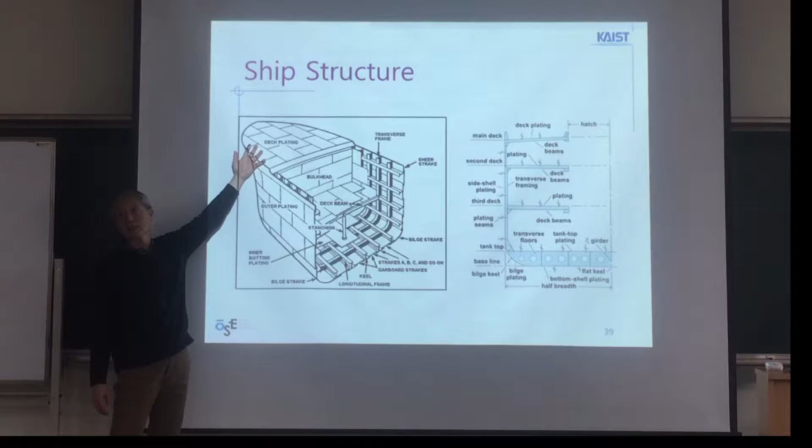But anyway, so you can imagine that 100,000 pieces of this steel plate is used to build a ship, right? And also you need to bend the plate and cut, bend, and also welding. That is the most important work for the shipbuilding company, in addition to engines and telecommunication and other, but it's the main body, structural engineers, stronger. So structural strength is important.

And then I usually use a bottle, water bottle, to show a ship, right? It can be a submarine, right? Submarine looks like this one, right? It can dive into the water. If you cut this one in half, the one half can be a ship, right? About half of the bottle.

But there is another additional structure, but the big picture of the ship can be one half of it. And then the ratio of length 20 centimeters, 25, and breadth 7, 8. So ratio of length and breadth can be how many? 5 or 4, right? The ratio is 4 or 5, right? It looks like that, but usually the ship, ordinary ship, large ship, the length to breadth ratio is 7 or 8.

Means it's longer than this. It's longer, right? So I can say this is slender. Some ships the ratio can be 10. 10 is double this length, or same breadth, right? Thank you.

How do you think about my length-breadth ratio of my body, right? Different ratio in here, right? Depth and breadth is different. Looks like a slender, right?

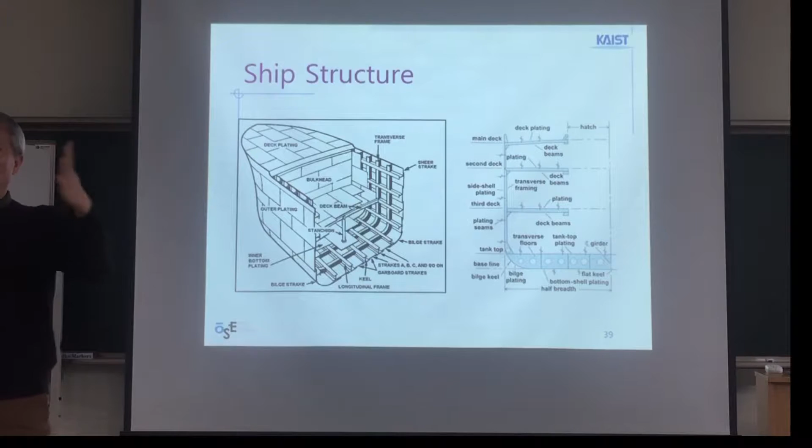Slender, comparing to ordinary. So for that slender body, the bending break fracture is the most weak point, right? Long, thin steel pipe can break in this way, rather than the other way. That's why the ship is kind of slender, so the midship section structure is most important.

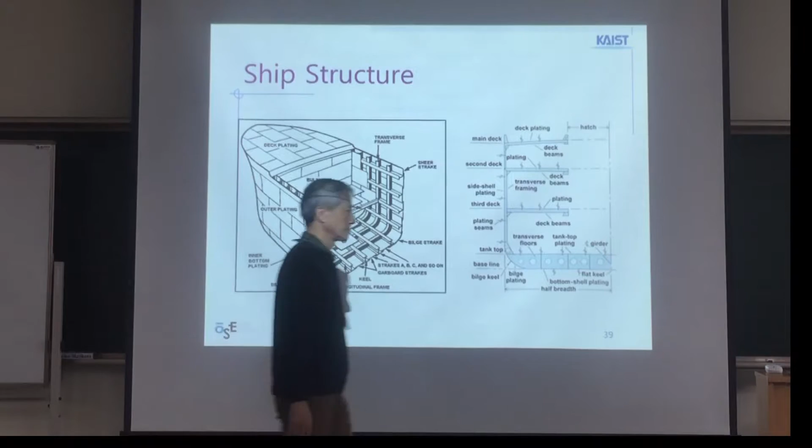Because of, you see, the rough waves, and in the middle there's a pen... Ship is slender, right, slender. Propeller is here, and wave looks like this one, right? Wave, ocean wave, big ocean wave. Then it's supporting this, but it's bending in this way, right, this way. It can break in the middle because of the long, high waves, because of slenderness.

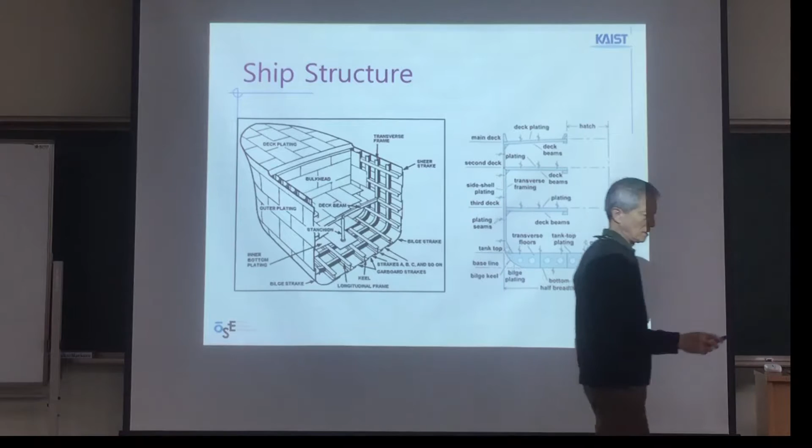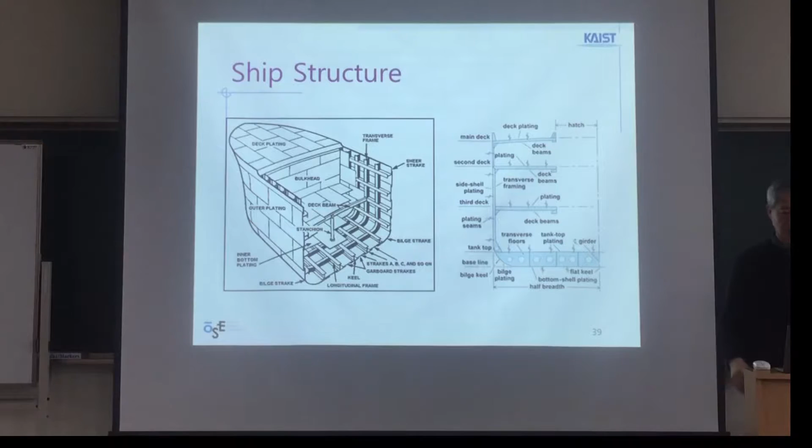And they want to make it strong enough, not breaking from the wave or other slamming or something. So that's why there are complex names and weight definitions.

Okay, when he bought this bottle, the bottle is fully filled, right? Maybe some air gaps are left there. If you fill it up to 100% with water and keep it down, how do you think - if I have a whole filled bottle...

If I put this one into the water, how do you expect it - is it floating or going down to the bottom? What is your expectation? Full of water inside, no air.

So what is your answer? Floating or going down into the bottom? Floating, or going down to the bottom?

Right, so we will see next time. He'll bring it. My answer is floating, right? We will see that, but it depends on...

See, water and water are the same weight, right? We call this a ratio, something. What is the English name of 비중? Specific weight, something, right?

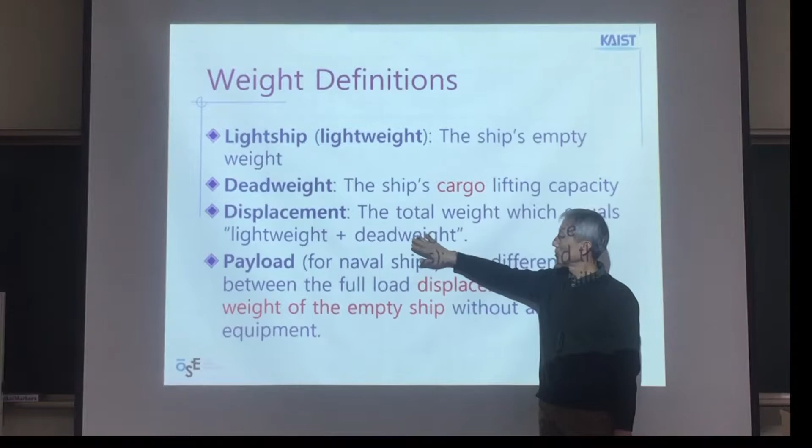Okay, then I want to start from displacement weight. Displacement weight is the total weight. Start from total weight, which equals light weight plus dead weight. Light weight and dead weight, right? So it's a total weight.

What is it? So if I - how big is it? How big is it? 500 milliliters, something like that. Half a liter, right? So then it is half a kilogram, or almost about right, half a kilogram weight.

So there is a total weight. If I place this one on the gauge, it should say, half a kilogram, right? But this here consumes one third, so it can be 0.3 kilogram weight. Now this is the total weight of this ship, or submarine, right?

Submarine. And then when I put this one into the water, then it is floating, right? Floating, but not floating in this way, but floating somewhere in this way. Somewhere here, right? The water line is here, right? Maybe here or here, probably around this, because this is what's inside.

Right, displacement. This is a static equilibrium between total weight and water support from the water. Then it is static equilibrium, floating in this way.

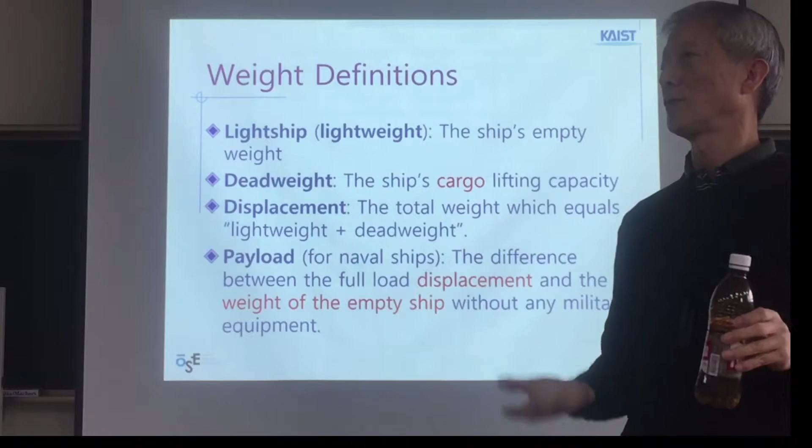부력, right? Buoyancy. But buoyancy, we call it altogether, is buoyancy. But what is a component of buoyancy? Pressure from the water.

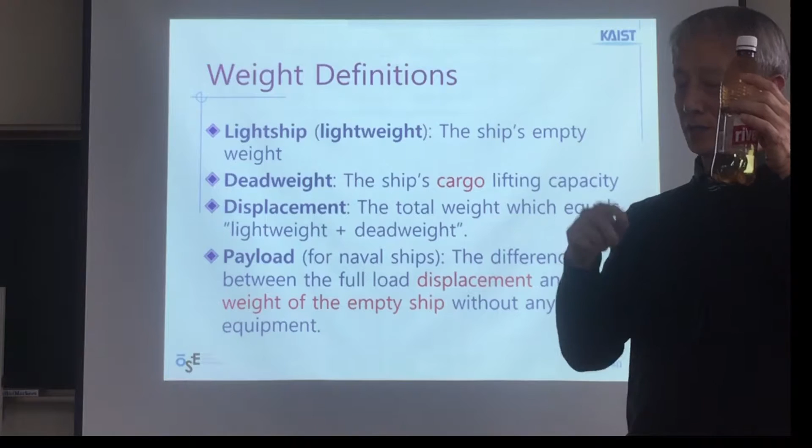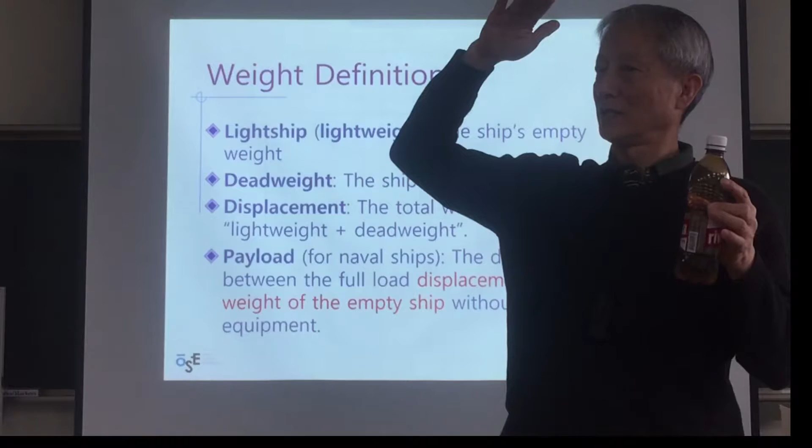Pressure inside the water is everywhere. At one point, the surrounding pressure is the same, right? But the water pressure depends on the depth of the water. If we go down to 100 meters or 1,000 meters, the pressure is very high, right? That's why a submarine collapses, right? So you can expect that if you put this one into the water, it's about here, but the pressure is...

Not the same. Almost zero, meaning atmosphere, same as air pressure, right? Going down, pressure is increasing, right? Because at 1,000 meters, very high pressure. So pressure is dependent on the depth of the water.

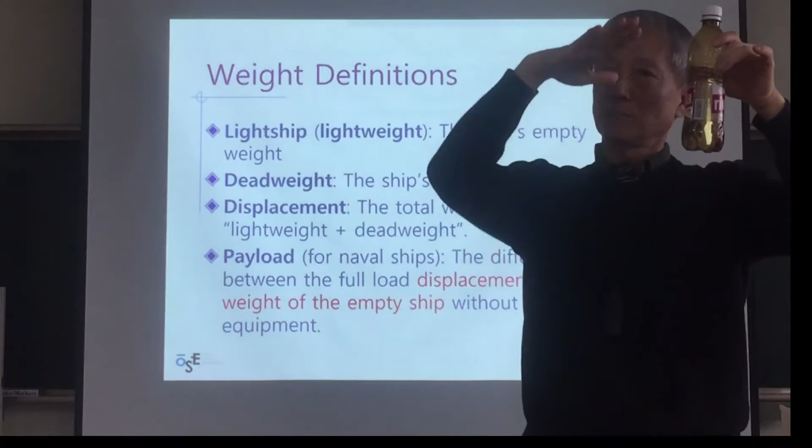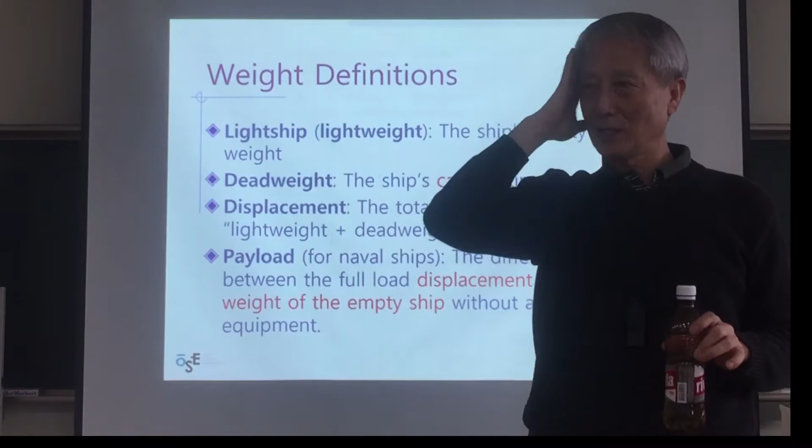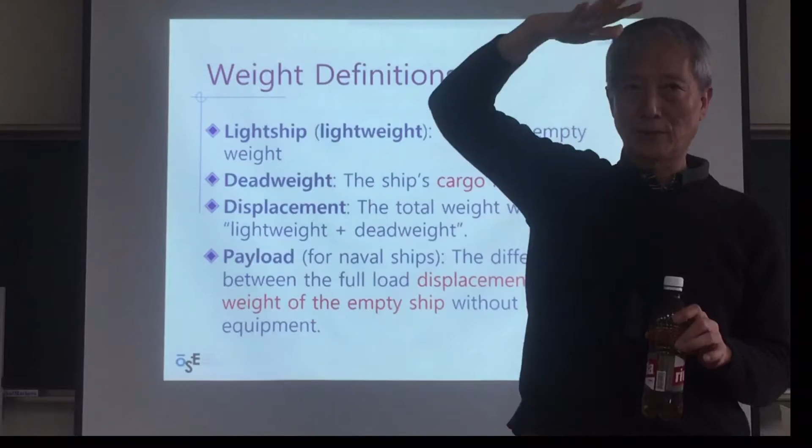Why? The weight of the water is compressing, right? Air pressure is also the weight of the air. We are experiencing pressure - you cannot feel this, but we are under pressure, right? Air pressure is coming from the weight of the air far away, probably 10 kilometers higher. That's where the pressure is from. So this water pressure is coming from the weight of the water above.

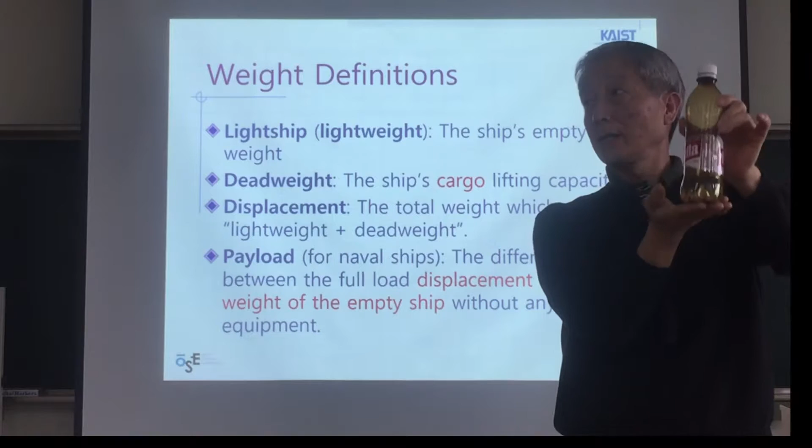When you integrate all the pressure, then it can be buoyancy altogether. That is the answer, right? So calculating the buoyancy is not easy, because pressure is changing, and also surface shape is not simple. If we are using a box, then it's simple. Not so simple, but you can calculate.

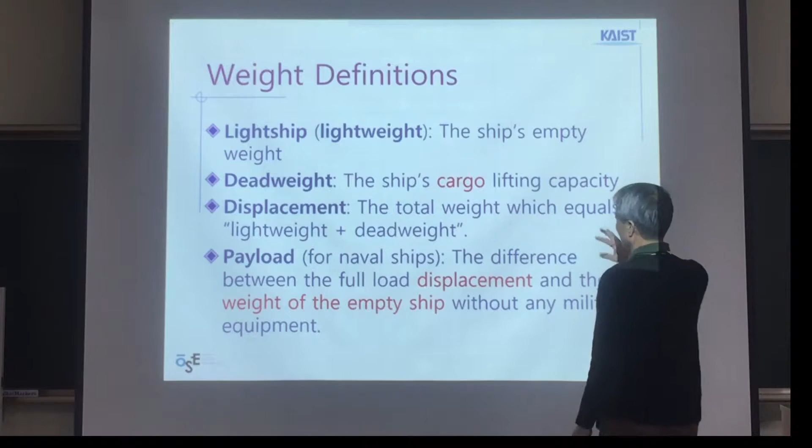So once again, what is displacement? The answer is the weight of displaced water by this object. When I put this bottle into the water, it is pushed down, right? And surrounding the object, so that submerged body displaces water. Instead of water, the bottle is inside. So the weight of this submerged body's shape and volume, that is displacement weight, same as the weight of the water. So we call this displacement - weight of displaced water by the ship or by any object.

This is static, not dynamic. Static. But dynamics coming later. So now, currently, we have a static equilibrium. Static forces, force equilibrium. Weight of the ship, right? Weight of the ship, and supported by buoyancy, or buoyancy coming from the pressure, water pressure.

So this total weight is lightweight and dead weight. Simply, lightweight is empty ship weight. When the ship is constructed by a shipyard, this is empty - just finished the ship, just constructed a new ship. Same as a new truck - you just buy from the car maker one truck, it's an empty truck. So the weight of an empty truck we call the lightweight of the truck.

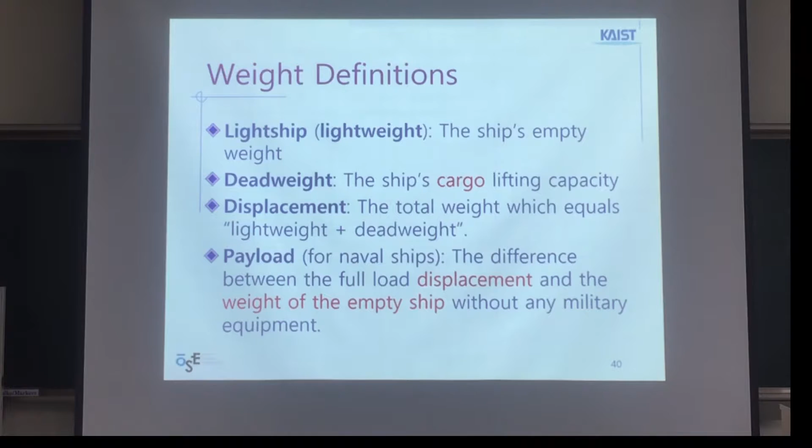So for a big truck, they carry only 1 or 2 rolls on the deck of the truck. They do not carry 10 or stack up to 20 steel roll cargos - never see this. Why? Because this is very heavy, and the limitation is already given to the truck. So it's allowed to carry only 1 or 2 rolls, that's enough - the other space is empty. So weight is very important for carrying cargo because there is a limitation.

Let's go back then - say, cotton carried as cargo is light.

Specific weight is far less than water. I want to carry many cargo to get more money, right? So cotton can be carried more than you can stack up. Imagine a truck case, I only carry cotton. Then you can stack up more and more, higher, because weight is enough, my capacity weight is enough. The limitation is coming from the height or volume of the truck.

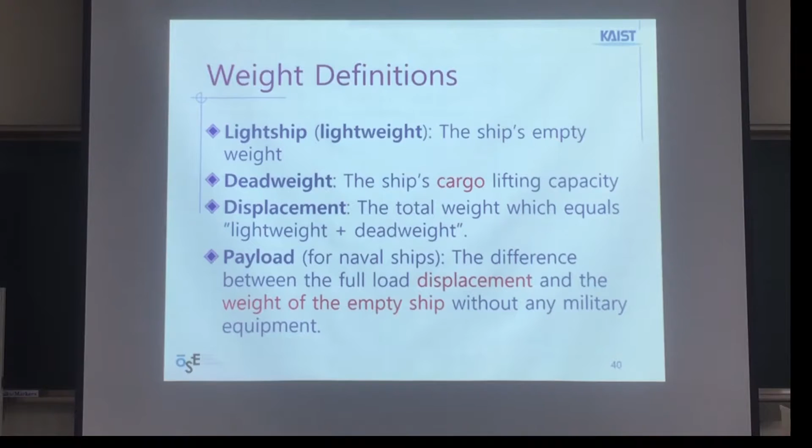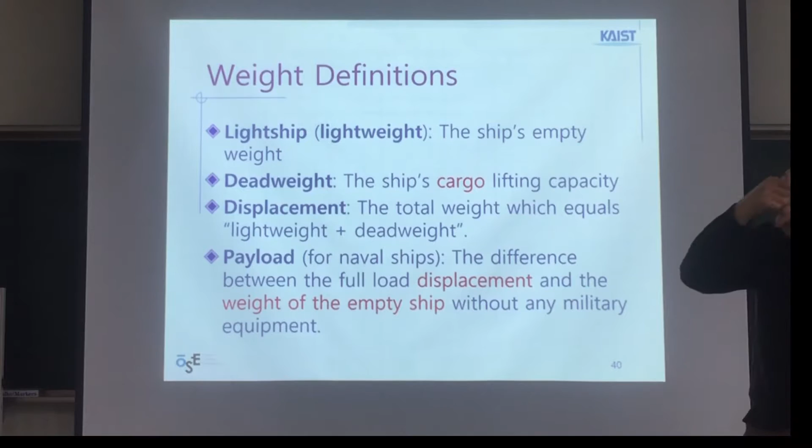There is also limitation by overbridges or bridges. You cannot go outside in this way or in this way. There is a limitation of carriage per truck, and also road is... So we call this two extreme cases. One is a weight limitation, the other one is volume limitation for the lightweight cargos.

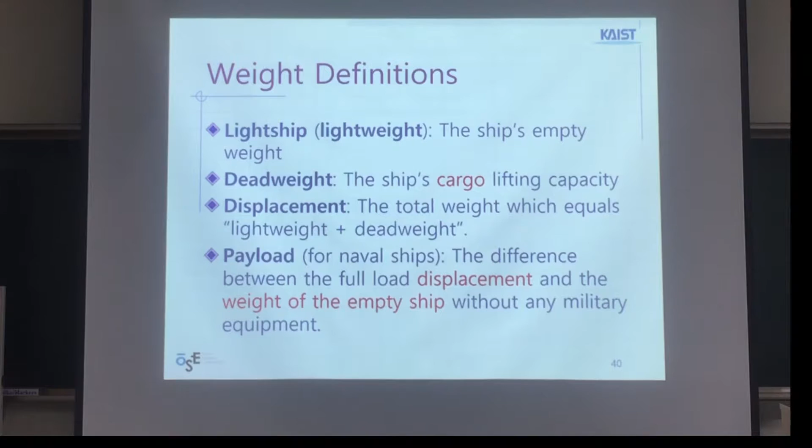Cruise ships. Have you seen a picture of a large cruise ship? Yes or no? Usually cruise ships are very high. The number of floors is very high, more than 10 floors above the ship. You can count, you can imagine this picture. I will show you later.

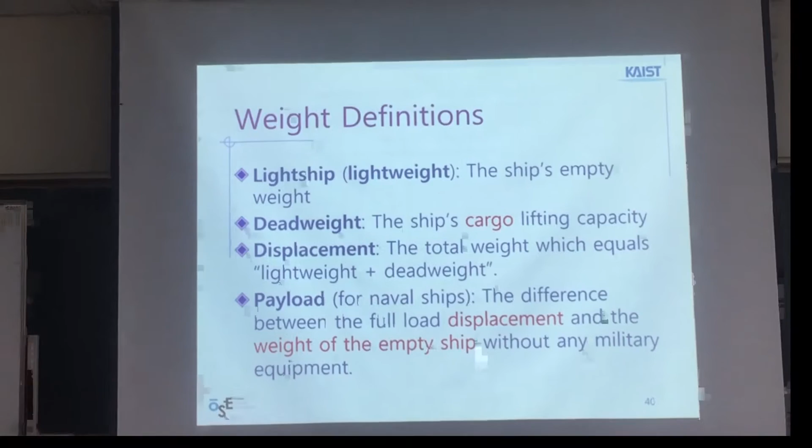Why? Because it is not weight limitation, it is volume limitation or area limitation. Everybody wants to have their own room inside the cruise ship. I want to probably pay more money, have a very luxury room and a higher place to see others rather than down below. So the ship operator, they want to provide more rooms to get more money. That's why they are stacking up. But the problem is this is not good for stability. If you think about a high-loaded truck, it is not good for turning in the corner, they may capsize the truck.

High stacking up, who carries cotton, they want to load as much as higher, because weight limitation is enough. Then it is difficult coming from stability. You should be very careful to drive that kind of truck. The cruise ship is similar, not the same case, but similar.

Higher, because of the money. The Sewol, for the Koreans, Sewol is the case. Actually the ship was imported from Japan as a used ship at the beginning, and then the Korean operator remodeled that ship to include one or two more stories to make more rooms. That creates a stability problem. So instead, they put more heavy weight on the bottom of the ship. But that is the behind story.

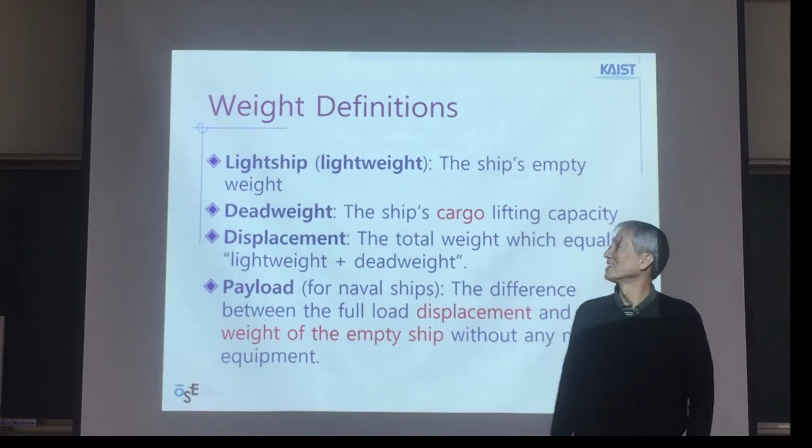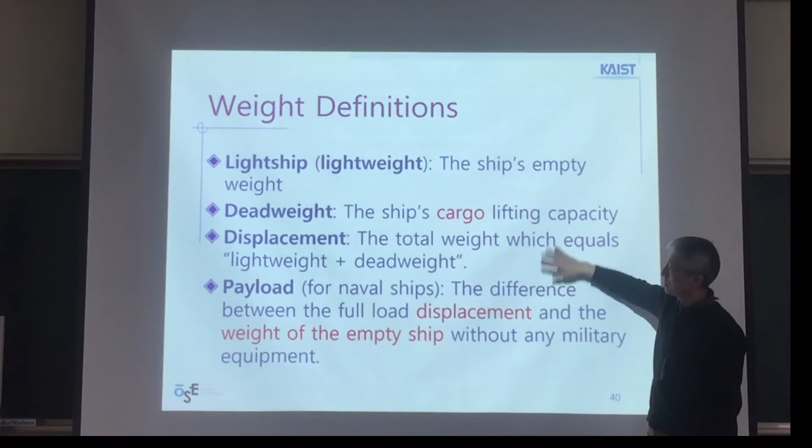But it is an important concept issue. So you understand what is empty ship, cargo weight, total weight, and payload, and deadweight is very similar, but a little bit different. Let's say for the truck case, should we include the weight of gasoline or diesel oil for operating the ship or cargo truck?

When you buy your new car, how much gasoline is inside? No gasoline? No, there is gasoline, otherwise you cannot operate it, right? So they usually provide you a very minimum level of gasoline inside. When I purchased a new car - have you purchased your car? No? Yes, oh you have.

You can think about a rental car. Have you tried a rental car yourself? Similar, right? They provide a very small amount of gasoline at the beginning, but nowadays the system has changed - they provide full or they provide middle size, but they write down the gauge. So if you return back with more gas, less gas, or the same gas, they calculate the difference.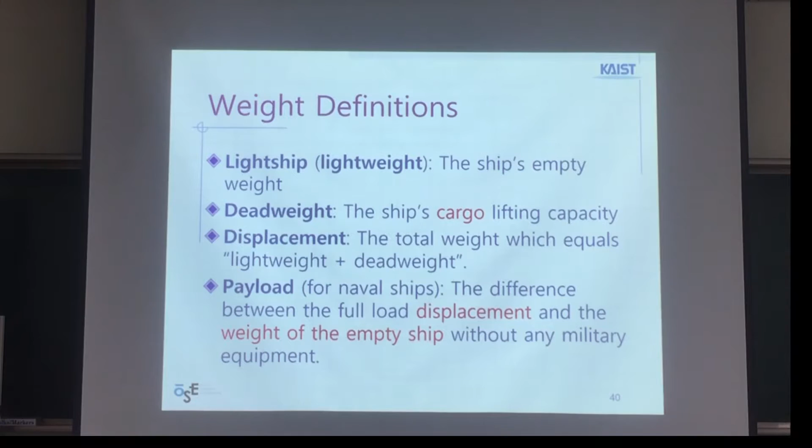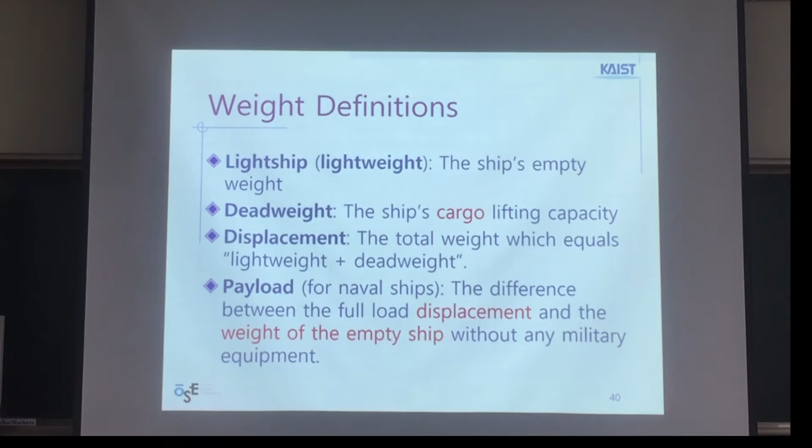But anyway, should we include the weight of gasoline for the ship, or onboard crew weight? How many crew are in the ship? Is it included in the lightweight ship, or payload, or total weight? So I said this is very similar but with a small difference. Small difference includes weight of fresh water, food, my baggage, something like that. But usually we use this for the Navy ships, this is for the cargo ships.

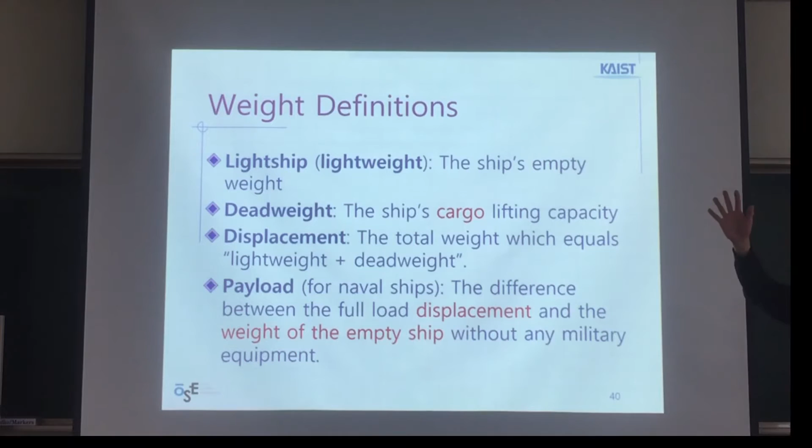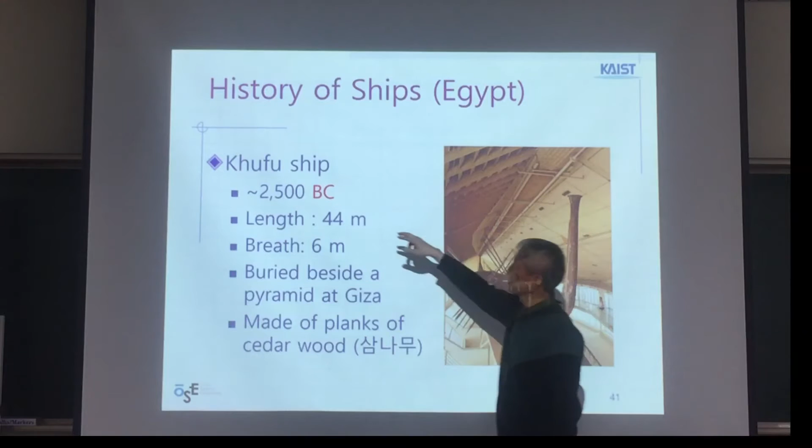History. Egypt. Khufu ship. Long time ago, before Christ. And length, breadth - so you can see the ratio is 5 or 6, on the side of the pyramid at Giza. So they may have been used for the river rather than ocean. And wood made - all ships, no steel, all wood.

Turtle ship, famous for Koreans. Turtle ship, it's also a wood ship. But they are saying some steel plate over it - steel plate, decoration for the fight.

Greek, a little bit later Phoenician, Greek shipbuilders and navigators in the Mediterranean. So once again, the terminology - I ask you to learn about 1,000 terms for shipbuilding. But the terminology is very special because of this long history.

These Archimedes are also BC, right? BC. Hydrostatics, static equilibrium - I explained this one using a bottle, your body, very similar to this. Probably he experimented with his body, probably inside of water, bathing. Not dynamics, hydrostatics. The dynamics comes with motion in the wave, right?

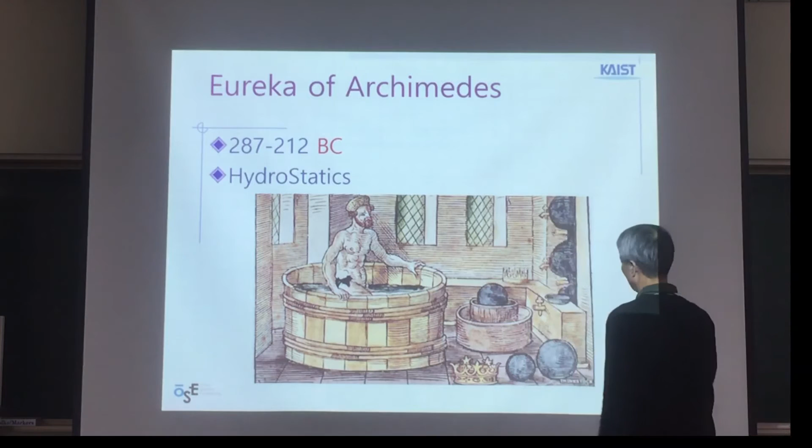I told you that we need to integrate the pressure of the water over the surface. It's not possible at that time. Currently we can use a computer to calculate integration of complex shapes. But instead, because it can be the same, you can use the other way.

Not only, but mostly for fighting. The turtle ship is also used between nations. So at that time, the ship was a very important device for war. At that time there was no pistol, only arrow, knife, and the ship was the most important device. Wooden ships, so old wooden ships.

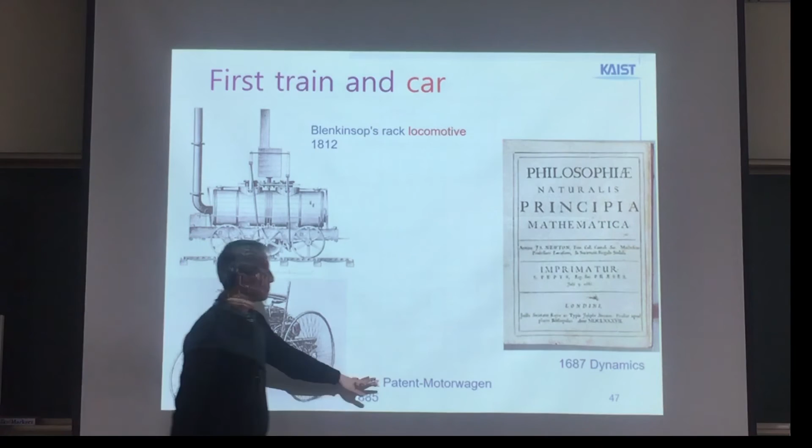And based on these theories and science coming from Newton, right? So you imagine that 200 years from these equations arrive at the engineering of engines - gasoline, diesel engines. And you can think about the ship.

And then it comes to the age of iron ships with steam turbine engines, so faster. The first iron steam ship - sailing and steam together, and also iron. Ironclad means the same as the turtle ship - the wood ship is plated with iron. We call it ironclad.

Titanic - I explained this one, right? Titanic, big disaster, very nice ship, a passenger ship. So it's early 1900s, about 120 years ago, or 110 years ago.

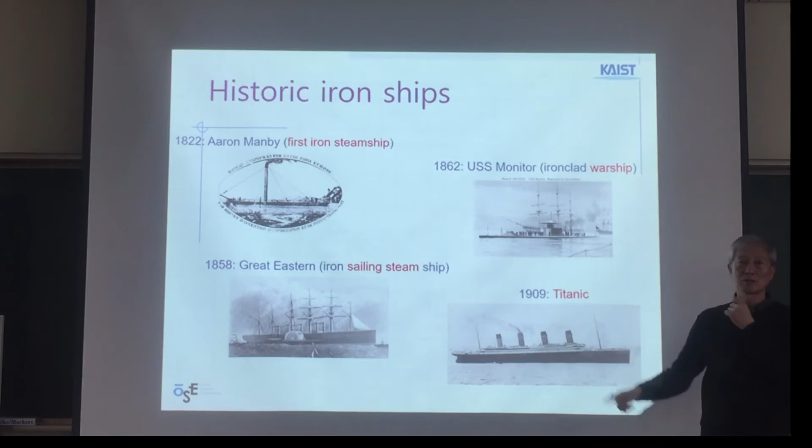Classification society. Classification society.

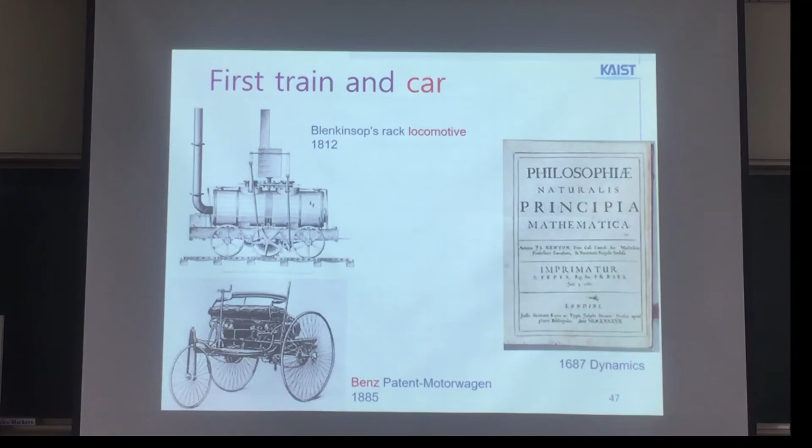Coming back to the Mayflower. Or who found America? Columbus. Columbus used - what is it - this is not Columbus's ship. Mayflower is different. I can't remember the name of the ship Columbus used.

Columbus used a ship to find the American continent, right? A long time ago, before this. But he needed money to have a ship, and also many people - crew members - and also food. So at that time it was a big venture company, because it's a high risk, high return business. He was trying to go to India, right? Not trying to go to America - Columbus happened to arrive at America.

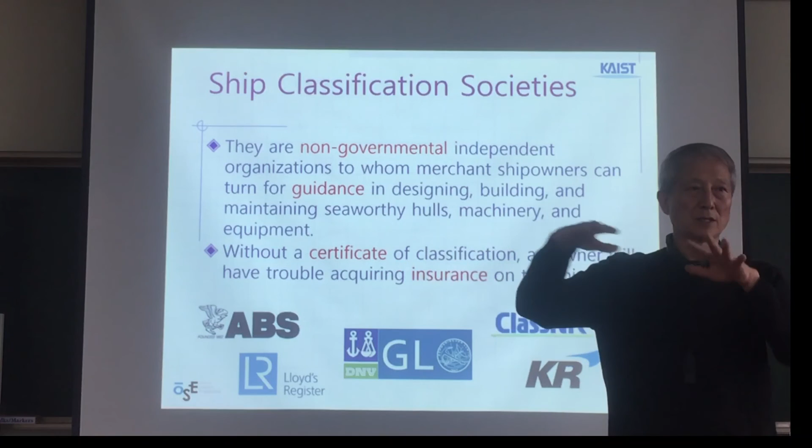I want to bring a very special food or material from India—how much, and when? Based on this story of trade, I want to make a ship like this one, this size and this speed. So then the design office makes a drawing.

So the design is provided by the design office, but it comes from the owner. It's like, I want to build my home, my sweet home. Then I usually decide my idea of what kind—two-story or one-story, a wood home, concrete home, or brick home.

Or $1 million—small money, big money, okay, say $1 million. I have $1 million to build my home. So, contract: I have a drawing coming from the design office, and I make a contract with a constructor.

A consulting company—$1 million is big money for me, so then I cannot check whether they use the correct material or the correct method or procedure. So I ask another company, a design company, to check whether they are doing it correctly. I do come by sometimes too, but I don't know the details.